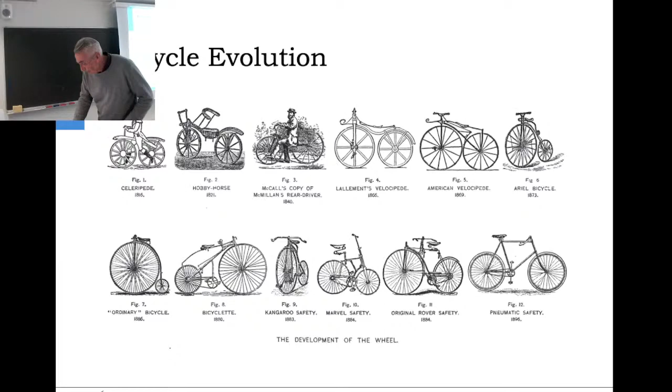Okay, around that time, 1890, also mathematicians, of course, and mechanical guys asked why is it that the bike stays upright? And then Whipple in the UK and Carvallo in France, almost simultaneously, like Newton and Leibniz, it's always that somewhere an idea exists around the globe and people start thinking about it. And people have priority, but well, priority is always difficult.

Anyway, they come with a model and they like it as simple as possible, but still with all the ingredients you want to study. So rigid bodies, fixed rider, hands-free, everything's symmetric, knife-edge wheels, so point contact, no side slip, ideal rolling conditions, flat level road, no friction or propulsion. And on these assumptions you can make a model with 3 velocity degrees of freedom.

Meaning you have a bike and the person is glued to the bike, since we're not interested in control, and then you can move back and forth, that's 1 degree of freedom. The bike can lean, that's the second one, and you can steer, that's the third one.

But due to these wheel contacts, which in a nice way are called non-holonomic constraints, you have a bit of a difference between the configuration space, the coordinates, and the velocity space. Because the configuration space is of course bigger than 3 degrees, because you can put your bike anywhere on the plane at some heading, and that will not show up in the dynamics. In itself also a very interesting topic, but I cannot talk about it.

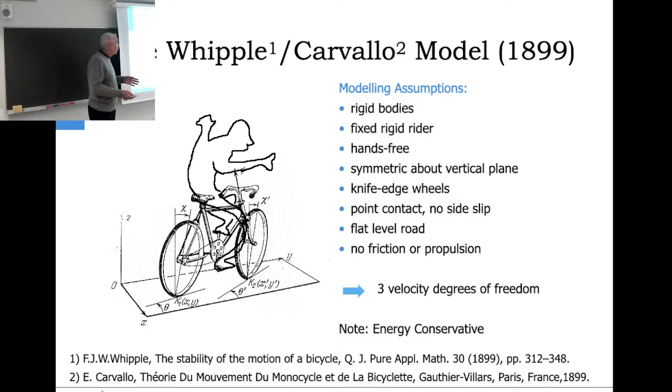Note that the system is energy conservative. No energy is going in or out. And that's already a bit in contradiction with what we see, because we saw in the video that there was an oscillation and the oscillation died out. So we said that's damping. But in this model we have energy conservation. So you could say, I don't know if I'm going to see this whole stable thing, or maybe something else is going on. So what do we do?

Well, this is your daily bread work, right? No problem. What do we do? Well, we just apply Newton. People get bored easily because this is so easy. You know, this is like daily living.

So you just do some Newtonian mechanics on the constrained system, and then you get your differential equations for your 3 degrees of freedom. They are second-order differential equations. And the lean angle phi, the steering delta, and the forward speed are decoupled. We do linearized equations because we want to study stability.

In a linearized sense, the lateral motions, which are the leaning and the steering, are coupled, and the forward speed, the forward motion, in this linear system riding straight ahead, not going in a circle, is just decoupled. So let's start with a simple one. V dot is 0, meaning that the forward speed is constant. Which makes sense, there's no propulsion or braking.

And then the other one is a coupled second order system of leaning and steering, and there's some mass matrix, of course, there is some sort of damping, and that's linear in the forward speed. We find forward speed interesting because at 0 speed it falls over, but given some speed it stays upright, so we try to pull out that one parameter, that speed. You could also pull out the wheelbase or the head angle, but for now we find the speed very interesting. So this term is linear in the speed.

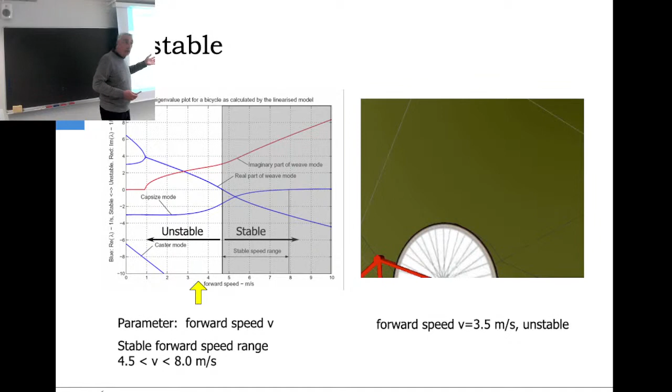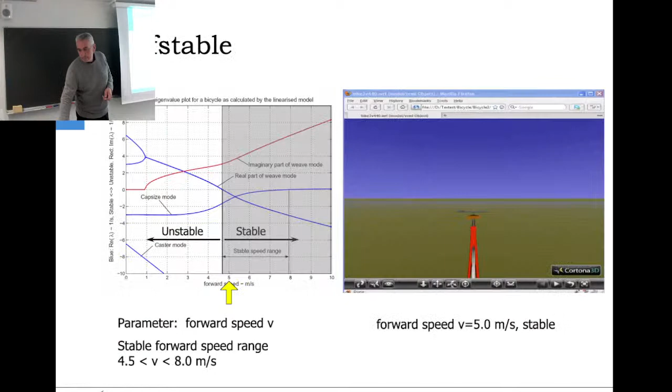If you have a toolkit, there's not one screwdriver and one pliers and you say, okay, this is it. No way. Your toolkit is filled with all kinds of tools, right? So we need all kinds of tools to analyze our dynamical system. And one of them is linearized equations to look at stability. Which we haven't discussed much. We have not discussed much. But in a real design problem, it becomes very handy to use it every now and then.

Excuse me. The speed range that you introduced to us was between, I believe, 0 to 10 meters per second, and you said that the most stable state is between that. What I'm curious about is what happens afterward. You mean if you get more speed? Yeah, if you go faster. Oh yeah, that's a limit case. So let's assume you go very fast. First I go back to the equation. I'm an equation man, right?

So let's assume that V is very large. Very large compared with what? We always have to compare things. In this case, we have two terms. One is a gravity term, and the other is this velocity term. So if V becomes large, the gravity term stays constant, so you can sort of cross out this term, right? So it's like cycling in space. There's no gravity. Let's presume you can cycle in space in some way.

Then it becomes interesting, because the phi dot and delta dot terms have linear v, and the phi terms have v squared. If you now make the characteristic equation, the gravity term is out. And you suddenly see you have lambda squared, lambda times v, and v squared. Then you can do a scaling by dividing everything by v, and suddenly the whole velocity is gone. The eigenvalue divided by the velocity is just the thing you want to calculate.

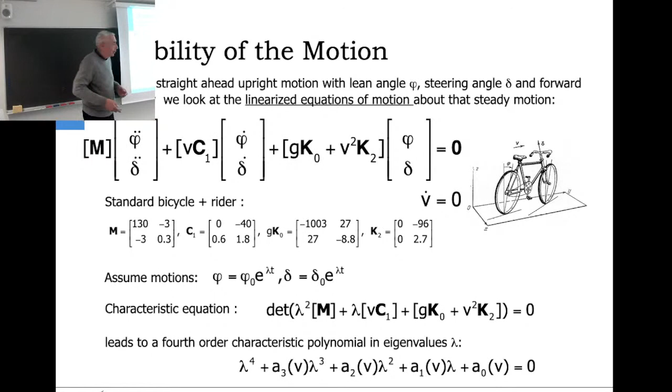Let's go to the figure. What do we get then? We get just four numbers, and it's all linear with speed. So this line is coming to the origin, and it just progresses linearly. This line will go eventually to 0 in an asymptotic way. This line will also progress in this linear sense, and this one too.

So from a stability point of view, the capsize mode will go away, of course, because capsize had to do with gravity and there is no gravity. And the whole dynamics then just scales with the forward speed. So if the speed is twice as large, the oscillation will be twice as large. But it's stable. Yeah. Good question. Nice.

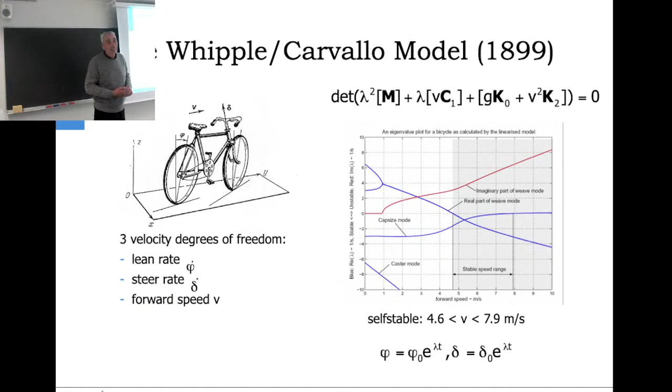Okay, bicycle self-stability. Now we've shown by a very simple model that yes, bicycles can be self-stable. The big question is, why are they self-stable? Which ingredient makes them self-stable? Is it the pressure in the tire, or the nice yellow handlebar which you have, or the wheelbase, or because we have the wheels turning and it's like a gyro, or you have a slanted head angle, or it's the position of the rider on the bike?

You like to understand the system, and for understanding this self-stability, I always call it automagic control, because it goes by itself. How does it work? That's a difficult question. So we want to know actually how does a bike balance itself, and we have no clue because we cannot say, hey bike, how do you balance? And then the bike will be very quiet, right? It will tell you nothing.

Well, we could think, well, how do we balance the bike? Because if we are able to balance the bike, probably the bike, if it's self-stable, also will do something like that. The bike is sort of an optimizer. But still, if I ask people in the audience, how do you balance a bike? What do you say? How do you balance your bike? It's completely intrinsic, I believe. Like you do it somehow subconsciously.

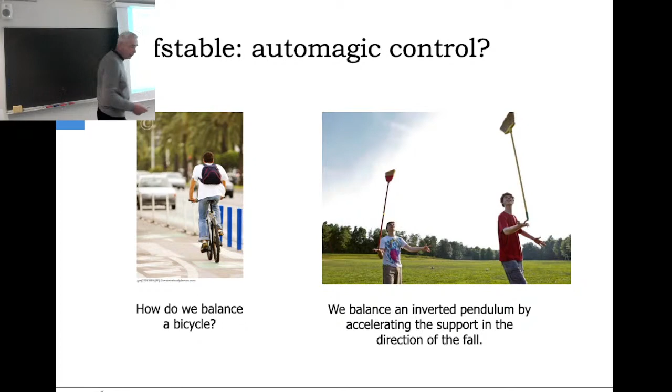So what I do is, if the stick falls to the right, I move my hand to the right. And if the stick falls to the left, I move my hand to the left. So, as you say, with the center of mass, I try to put my hand all the time under the center of mass. And the center of mass is moving, so I have to move my hand, but in the end that sort of works. Okay. Now with that idea in mind, balancing a stick on your open hand, how do we do it on the bike?

So for the bike to balance and move the contact points, we have to move the earth, right? It's not going to work. So apparently there's another system, and yes there is. We have a steering assembly. So if the bike is moving forward and we make a turn, then we move our contact points in a lateral sense. For instance, in this case the bike is moving forward, I steer to the left, and then my front wheel is accelerating to the left. And then my hind wheel will trail in that same direction, of course.

But I have a mechanism here by which I can move my contact points to the left and right. And the mechanism is called my steering assembly. So apparently, only with the steering assembly, you should be able to balance. Well, you need not fall off the bike, but the whole system can apparently be balanced. However, there is an interesting thing already.

So if you fall to the left, then you want your contact points underneath. So then you have to steer to the left to get upright. And that sounds super crazy, because you would think, oh, if I fall to the left, I steer in the other direction. No way, that's totally going wrong. Double trouble, we call that.

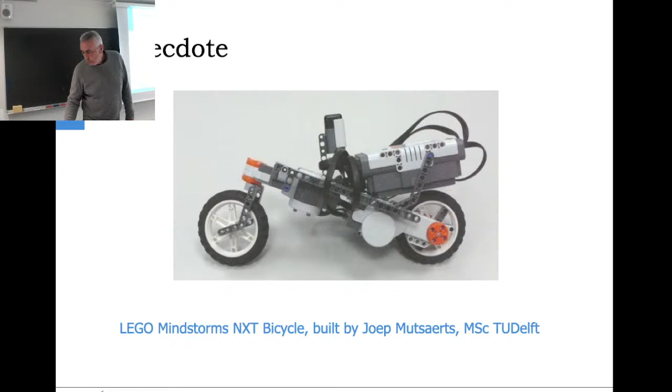And then Joep Mutsaerts built the thing as a master student, and actually he couldn't get it working. So I said, well, you just apply a steer into the fall. And then he said, yeah, how do I do that? Well, I said, there's a very simple law, steer into the fall. You have a steer motor, it's probably a small DC motor. So you apply a voltage; the voltage which you apply to the DC motor is apparently the torque. That's at 0 speed, because there's not much steering going on.

And then you measure the lean rate of the thing, and then you multiply it by 10 or minus 10 or 100 or minus 100 or whatever. You need some gain here, you need to have the sign right, otherwise you steer in the wrong direction. But you have to fiddle a little bit and it will work. And instead of going to work, he looked at me and said, yeah, but that's only one line of code in my controller. I said, yeah, okay, what's the problem? Because before he had the angle and the speed and this, he had a very complex thing.

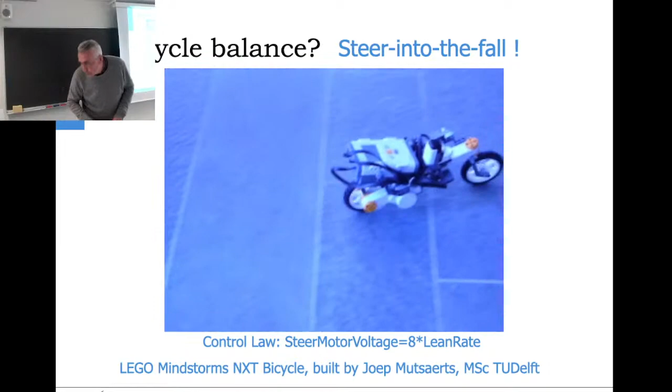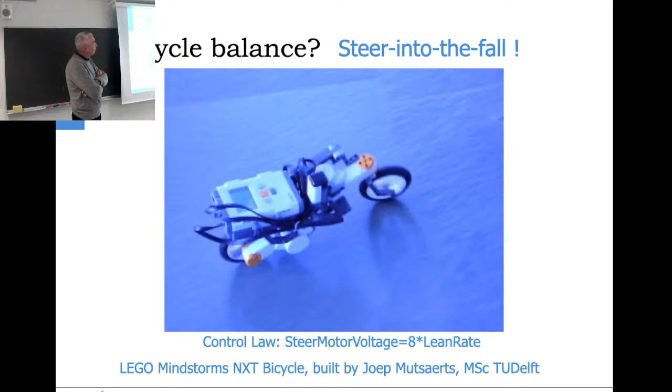So he went away, and after 5 minutes he returned with this thing. Totally autonomous, and the only control law is steer into the fall. It stays upright, so it works. And again, if you look at the video in slow motion, you see the bike falls to the left and then steers to the left. Bike falls to the right and then steers to the right. And of course, because it's the only way you can balance. So we observe it also in a real bike.

Of course, then comes the next question. Why does the bike do that? Does it have some deeper mechanism to do that? And there were actually 2 groups of people who had given that thought. One was, well, it's a gyroscopic effect of the front wheel. So the front wheel is like a big gyro wheel in space. It's rotating, and with gyros, it's always a 3-dimensional thing.

So if you have a rotation about one axis, and you then rotate it about the second axis, the vertical one, you get about the third axis, the horizontal, a torque. That's what you feel then, also. And if you look, the signs are correct. So if the wheel is turning like this, the angular momentum is in that direction. If you then steer it in that direction, then you have a change in angular momentum, and that makes this balancing act also in the right direction. So yes, this steer into the fall can be done by gyroscope.

However, if you check the numbers, then the rotation speed is not so high, the inertia is not so high, and the torque is very little, but on the other hand, the steering assembly is also little, so who knows?

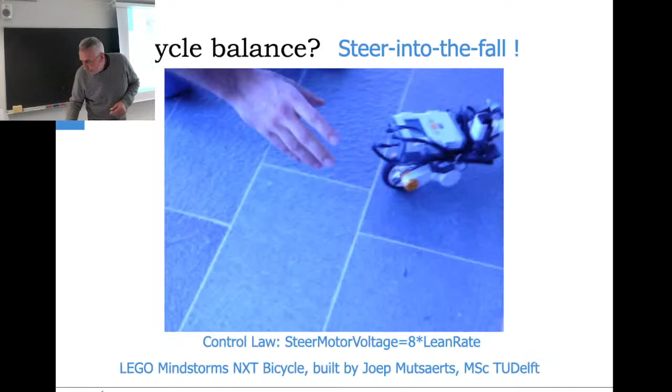Something caught my eye at first, and now I saw it again. Why does this bicycle in the previous video not have a seat? Does it have any effect on the center of mass?

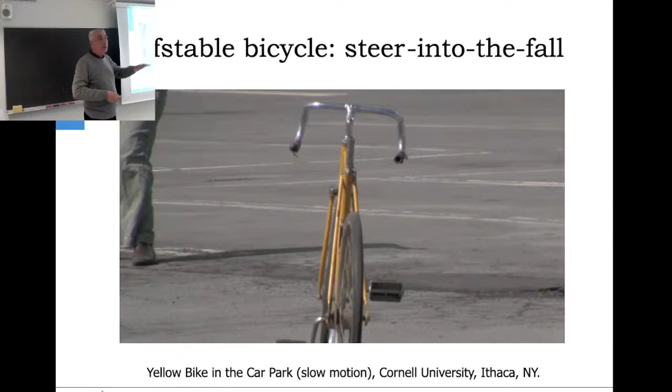Well, you could investigate that, of course, in your model. You could say, well, if the mass is lower and the center of mass is low, it changes the dynamics time scale a little bit, but that's all. Not so much. Good point. And there's nobody on it because of ethical reasons.

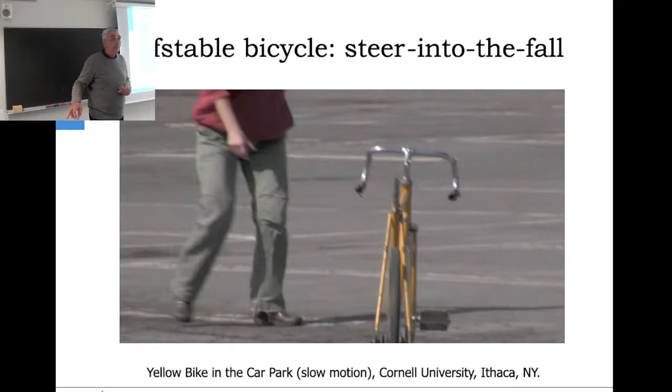Since we are paused, can I ask a question about that number, that constant? How could you arrive at that 8? Oh, yeah, actually you at least need a PhD for that. Too soon to ask. And then the question: after you got the PhD and you took all the classes, how do you derive that?

Well, you just guess a number. So you get the PhD first and then you guess. You just say, okay, let's start with 1. Oh, it's the wrong way around. Let's do -1. Actually, nothing is happening. Maybe it should be bigger. And then 100. No, that's too big. So you came to that by trial and error? Exactly, and a little bit of intuition.

Okay, and another thing: in order to go back to being stable, we have to, not tilt it, but somehow give it a new direction, based on what you said. I don't know how to say what I mean. Steering into the fall? Yeah, steering it. It might sound stupid, but I'm curious about it.

Does it matter, the scale that we steer it? Somehow there should be an optimized value for that. If we go a little bit more than that or a little bit less than that, what would be the result? Are we going to be stable in less time, or does it take more? Good question. I have no idea.

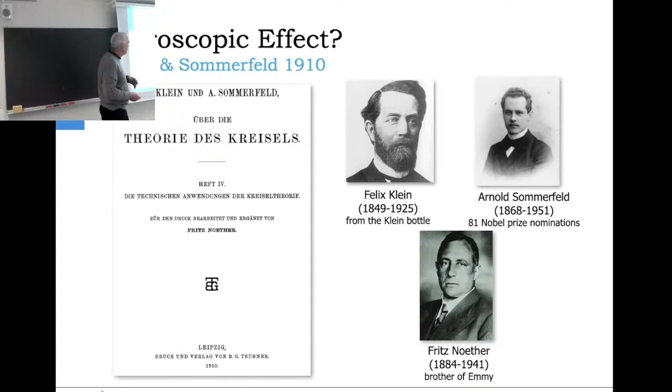So then, in the fourth volume, it was about all these applications. And of course, if you're in gyros, you look around and you see gyros everywhere, right? So when they looked at the bike, they said, "Oh, there's a gyro." So they immediately dug up the literature. They looked at this Whipple paper, went into the derivation, and showed from the stability analysis: well, if you kill the gyroscopic effect, it can never be self-stable, because the equations tell us this sign is plus and that's minus, and we kill it, it's gone.

And let me guess, this was the last book about the applications. The applications, yes. Last book.

However, my friend Jaap Meijaard, who is my colleague on this work, he is the smart guy. He just followed the whole derivation, and he discovered 2 small sign errors. And mind you, the book is from 1910, and after that everybody copied the result, right? Until 2017.

So no one noticed that there was a problem. No one, exactly, noticed that there was a sign mistake. The only thing they were debating was whether these effects were bigger or smaller. But they never checked the work.

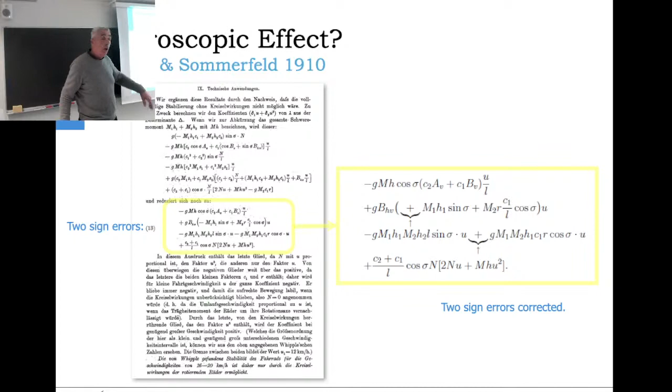They never checked it. So between 1910 and 2017, finally in 2017, Jaap Meijaard discovered the 2 sign errors. He puts in the corrected signs, and then it's not so clear anymore that if you kill the gyroscopic effect, the thing is always unstable. So that's one debunked thing, because everybody was always giving a reference to Klein and Sommerfeld: the bike is self-stable because of the gyroscopic effect. Maybe not.

However, Jones, from Cambridge I think, 1970, PhD. He was, I think, in chemistry, but he was interested in cycling, and he had an intuition that the gyroscope is not so important, it's a small contribution. So to demonstrate that, he built an apparatus where you kill the gyroscopic effect by mounting a counter-rotating wheel next to the front wheel in one frame, so the net angular momentum is 0, and then he says, look, mommy, I can even ride without hands.

There's no problem controlling this bike, because self-stability and ease of control, he said, are identical things. I have no way to measure self-stability, but I can measure very well on the bike how easily I can control it. I can ride it without hands, no problem. So the gyroscopic effect is probably not so important, because with and without, I feel not much difference.

Then he looks at the trail, where the contact point is behind. He changed the trail so the contact point is in front of the steering axis, by putting that wheel forward. And suddenly, it's a horrible bike. He cannot ride it without hands. With hands, it's very hard to control. So he said, well, it must be this trail thing.

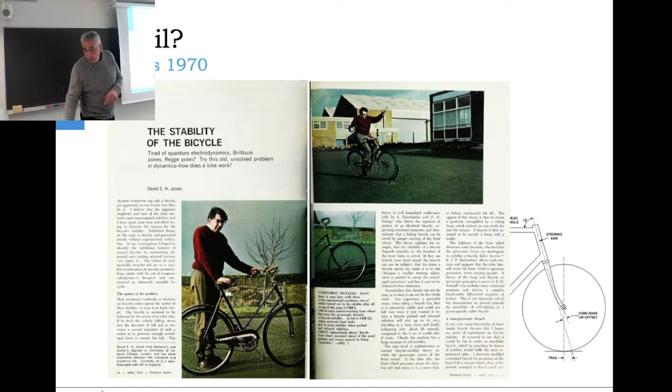He does some analysis on potential energy in gravitational systems, comes with graphs and slopes and reasoning, and says, look, if you kill it, then it's all negative and unstable and it shouldn't work. There's a small thing here. He only uses gravitational energy. That means speed plays no role. Gravitational energy is the same for a moving bike as for a steady bike. The whole dynamics doesn't come into play.

So if we correct his reasoning with our dynamical system, another term comes up, and then it's not so clear anymore that stability is lost if you make the trail 0 or negative. Again, a lot of people followed Jones after the 1970s: Klein and Sommerfeld's effect is small, it's the geometry of the steering assembly that's important. Both things are apparently not necessary. And we are looking for necessary conditions for self-stability. Sufficient and necessary.

So what do we do? Well, we have our model. That's simple, right? We have our linearized equations. This is the bike with our 3 degrees of freedom, a manageable system, not too many degrees of freedom. However, the family of bikes is big.

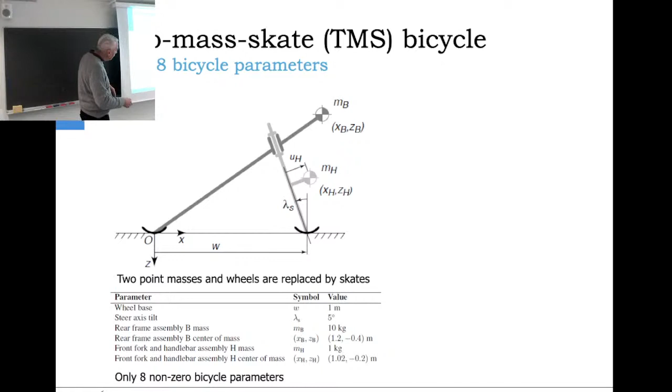And now with the 8 parameters, I can write those equations on one piece of paper, and I can go through my equations. And I can finally come to the conclusion that the position of the masses, the mass from the rear assembly and from the front assembly, have some condition where they have to be. If it's here in this area, there is no condition on the mass. If the front mass is in this area, then it's always self-stable. And if the front mass is in this area and fits this condition, which has to do a little bit with the geometry, then it's still self-stable. So mass must be up front here and have some condition in relation to the geometry.

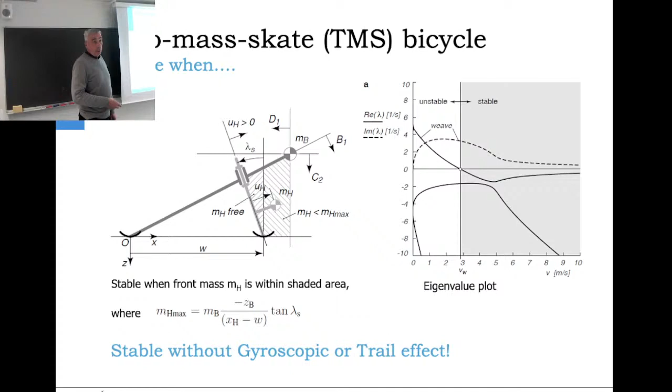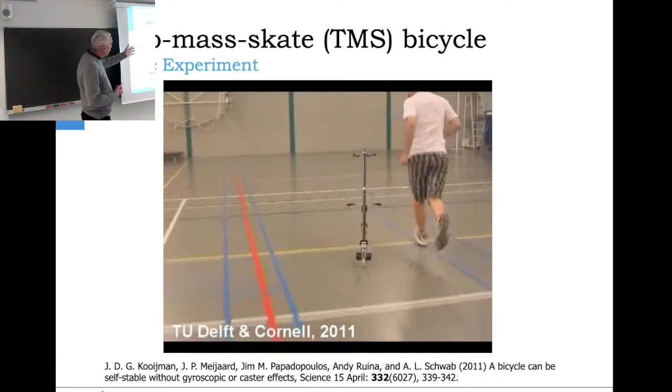And then if we look again at the forward speed and the eigenvalues, we see this clear cutoff, and after that speed, it's always self-stable. Stable without gyro or without trail. So that is interesting. So then we build it. We build the machine, we go to the sports hall, and then we just give it a forward speed, and it stays upright.

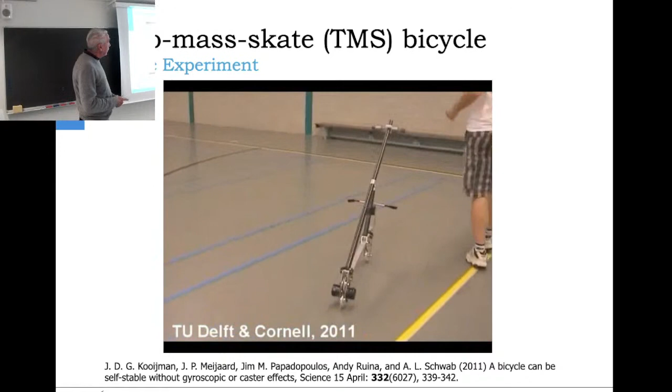I didn't plug in the mouse? That's not too bad. It's okay. That's your computer. What battery is that? Okay. All right. So again, let me go back because it cut my story.

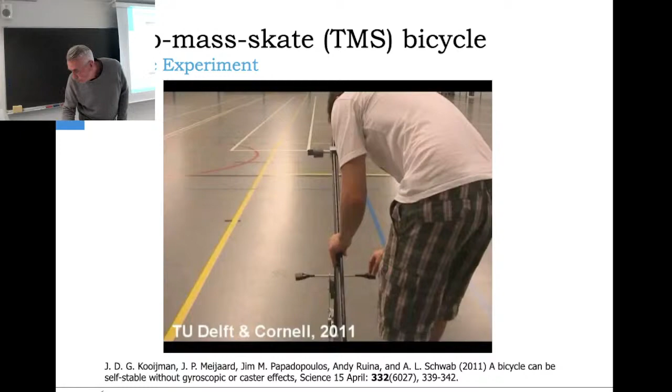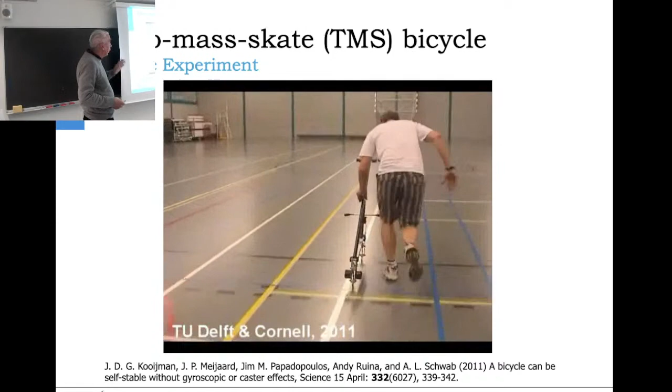So again, we give it just a forward speed and put it in this straight upright motion and see, will it remain there? There's always a small perturbation, of course. It remains there. And then we do the second test: we propel it, and then we hit it sideways, and hopefully it will not fall, and it will come back again, and you see, there's oscillation and the oscillation dies out. So self-stable, without gyro and without trail.

And that was actually the topic of our publication in 2011, and we were able to publish that in Science. And we needed that. Because before that time, when I talked about bicycle dynamics, people said, nice hobby. What is your work? I said, bicycles. No, your work, not your hobby. I said, no, that's our work. Oh man, that's more than 100 years old. There's nothing new there. Are you not in AI? No, bicycles. This paper finally showed that there's things still in this whole bicycle dynamics which are unclear, or where people thought it was because of some printing error.

Yeah, but that's nice, because you know Science. You make a list of most appreciated journals. Is Science the first or second? That doesn't really matter, but it's really highly appreciated, together with Nature. And then there's a whole big hole where there's nothing.

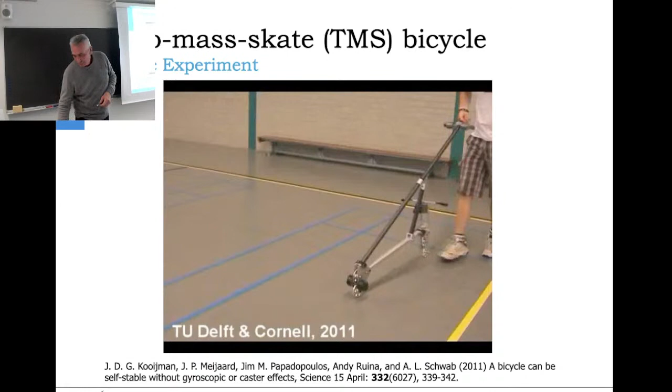So I think it's with an index of 57 or 60, something like that. And then highly appreciated. Multibody System Dynamics is... so one, that's done. Could be a bit lower. Let's say that is lower than science. Yeah, I can say that with a high confidence. Me too. But we're doing our best, eh? Yeah, of course.

Okay. Now we looked at the bike, right? The next step is, of course, what are we doing on a bike? Because we've seen that for regular bikes at slow speed it's unstable, and if you look outside, people do not fall. Well, some people fall, but they even can ride at low speed. So what is going on?

Sorry, that's my... I'll close it. Okay. Close. Go away. Connection lost. Close. Yeah, it's gone. Thank you.

So, riding control and handling. The big question is, what do we do on the bike? How do we keep the bike upright? Two pictures. One of them is super famous. That's my daughter. She is super famous. I think she even popped up in talks in Japan where somebody used our slides and talked about bikes. So she's famous. And the other, I know this other guy, I think.

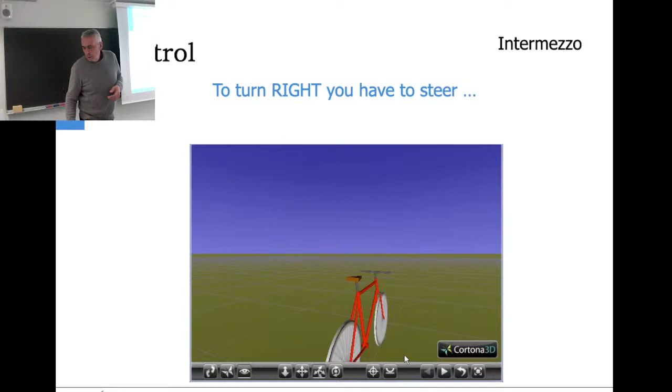Well, anyway, if you look at them and observe what is going on, you steer and you balance, but it's sort of unclear what you are doing. Is my upper body active? Am I doing a thing? Or am I steering and is the upper body passive because the bike is moving underneath? It's hard to distinguish what's going on. With respect to time, I skip this. So, how do we steer and balance?

Now, that question was already old, and in the Netherlands there were already people looking at bicycle balance, not because they wanted to know how people balance a bike, but whether it is safe to ride a bike when you are intoxicated with vodka or marijuana. And that's a typical Dutch question, right? And in the 70s, of course.

The ethical committee said, well, we probably cannot put intoxicated people on a bike and let them ride. So they said, we're still going to intoxicate them, but we built a simple contraption, a bicycle simulator, which leans and steers, and then we study their motions. And of course, looking at the transfer functions, they saw that when you're intoxicated the gain rises enormously, so the steering becomes a lot wilder, and the delay in your control also increases enormously.

And after that, it was not yet enforced by law, but it was an advice that it's better not to ride a bike intoxicated. But I think now it's by law that you're not allowed to ride a bike intoxicated.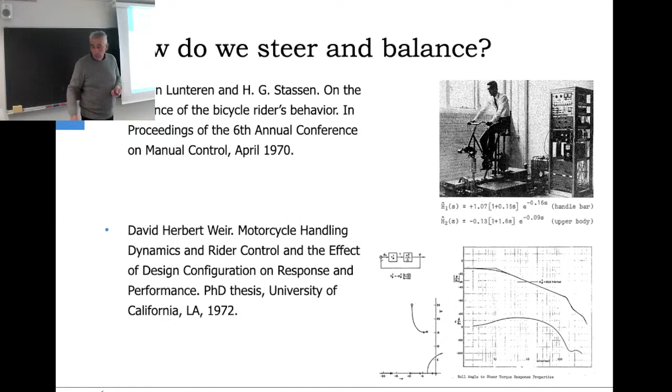It started with David Weir, who made models, and later those control models were validated by experiments. By the way, the conclusion of David Weir was that a regular motorcycle is safe to ride. We concluded it's not good to ride intoxicated. After that, nothing much happened. Still, we were interested in this rider control, so what did we do?

We put all these specific, these are the active markers on the body and the bike. 31 markers, 100 Hertz frequency, sample time 1 minute. One run is a lot of numbers, so we need some data reduction method to look at what is going on. By the way, we were riding on a treadmill, of course, indoor.

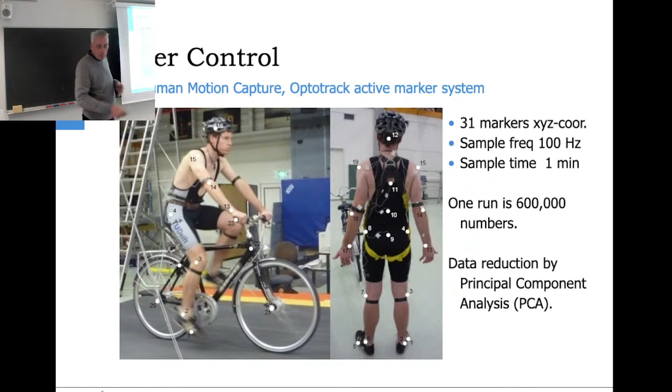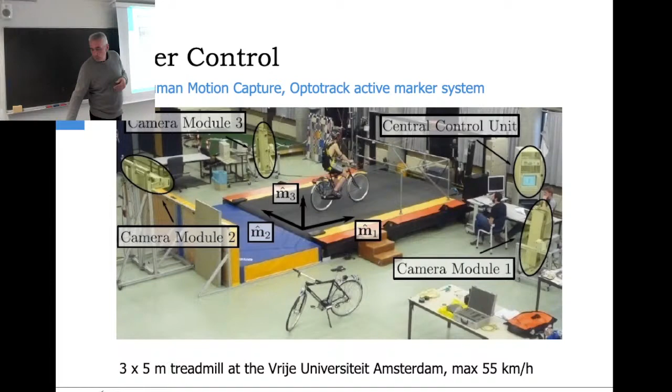And then this was the whole setup: big treadmill, this active marker system with the cameras, and then riding at various speeds and see what is going on. So here you see the video, and here you see the reconstruction of the motion. So a nice way that you can visualize it also. But here you move the ground.

Yeah, yeah. Does it matter? Is there a dynamical change if you don't? No, it is, and it's hard. I also had a very hard time understanding why it works riding on a treadmill, because you're not moving, and you have the idea that when you move, you gain stability due to your motion. But you told us. Exactly. Yeah. And that works. I mean, if you steer and the treadmill is going underneath you, it moves the contact point sideways. So that system is there, and everything is rotating.

But you can do a thought experiment. If you have a big oil tanker, you have a big deck, and the oil tanker is in the harbor, and you just cycle from the bow to the stern. You cycle on the ship, and oh, that works. I can cycle. And let's suppose you go 20 kilometers per hour. Then you ask the captain of the ship, please put 20 kilometers per hour speed. And then he does that, and then thumbs up, there we go.

And then when the ship is going in this direction, you cycle in that direction, 20 kilometers per hour. Right? So you're stationary to the inertial world, but you're cycling, and that works. I mean, you can cycle on an oil tanker. It's moving.

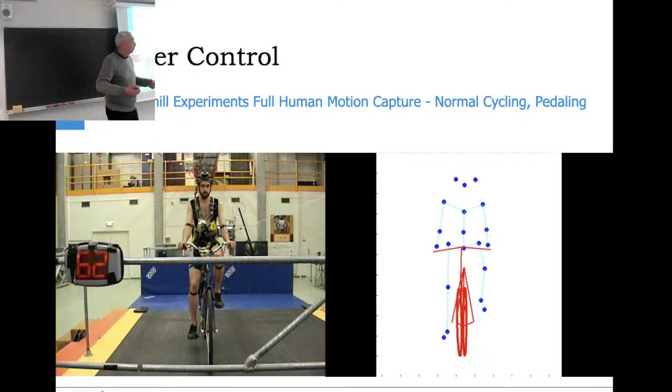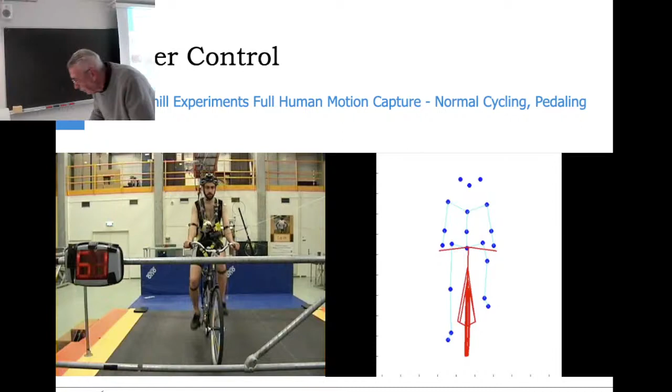Okay. Warning disappeared. Yeah, I can check. So it's no longer there. It's charging. Okay, that's good. So let me take a look. No, the connection is back on, so it's okay. So the only thing that disappeared was this camera from the OBS. Maybe, I don't know. I only know mechanics. Okay, so this is no longer connected. Can I take a look at your OBS? Of course. It's okay. So is it back? So camera is back. Yeah. Okay, thank you. But the slides are not in presentation. Yeah, there will be a delay. It will be soon. Okay.

Before you start, a question. It might sound irrelevant, but the purpose of all those strings, are they just for transmitting data? Yeah, so it's active markers. To capture motion, you have two systems actually. You have the passive markers, just reflective things, and a whole array of cameras that look at these passive markers and try to identify where they were in space. Sometimes markers get lost, and the accuracy is a bit low because the markers have a definite size. There's also an active system where you put small markers, but they are cabled, so we need to tether the person in. But we need to do that anyway because for safety we need a harness here.

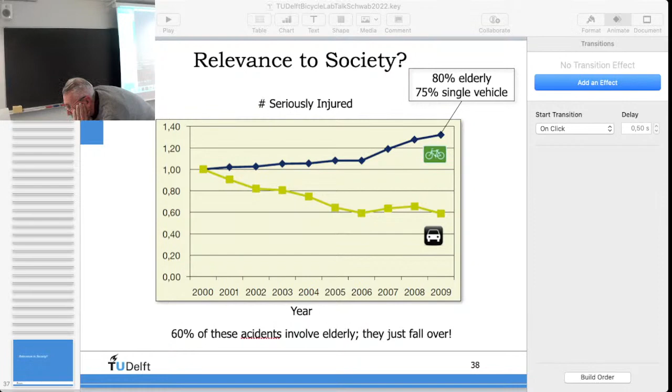So, more people get injured. Among those are a lot of elderly, and it's single vehicle accidents. They just fall over. In this falling over, the stability of the bike plays a role, and the rider control plays a role. So we'd like to understand what is going on. Are the bikes unsafe? Are the people not fit to control them? What is going on? What can we do?

Now, there has been an enormous rise in e-bikes, also here in Finland. And of course, everybody was saying, oh, it's these elderly on e-bikes. They're dangerous. They go too fast. Well, that's a nice scientific question. Is it unsafe for elderly? So we did a study with normal bikes and e-bikes with elderly in real traffic, measuring and seeing if they have extra attention.

It turned out that actually it was okay. Actually, those elderly were unsafe when they didn't have an e-bike, because then they were going too slow and they were not keeping up with traffic, and then things happened. But when they use an e-bike, they go as fast as the rest of the cyclists, and that's actually good. So the e-bikes were not the problem.

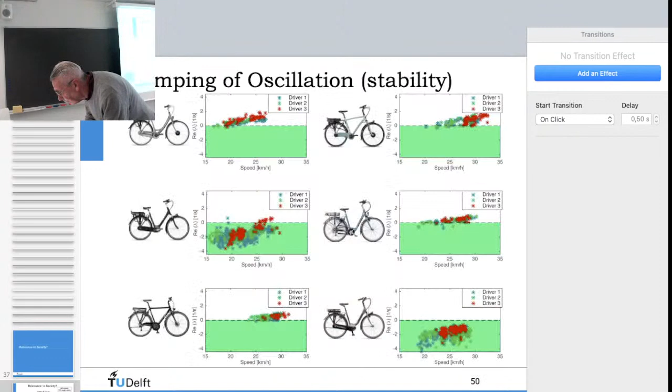So stop. Yeah. So it seems that this live streaming is not willing to change the slides. Don't know why. It changes when you do that, okay, but not automatically. Really?

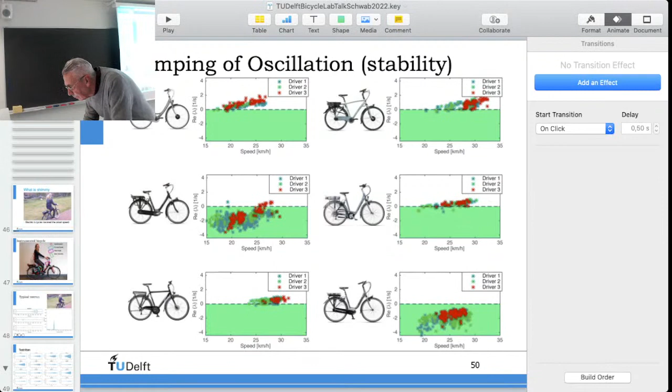What do I do then? Nothing. I think it's okay. It will be okay momentarily. No, it's okay. Yep, it's okay. Don't know why. That's okay. It is what it is. Continue? Yeah, okay.

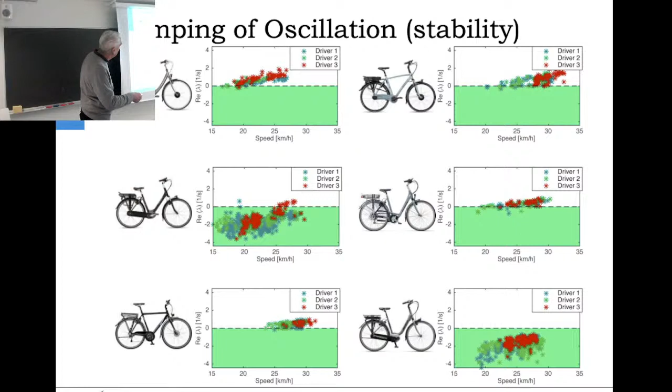Sorry. So this is a very stable one, and this is a very unstable bike, right? And then we try to find out what design parameters do that. So we make that same bicycle model, but now we have to extend it with some flexibility in the frame and tires, and that the upper body can move relative to the bike. So we have to add just some more degrees of freedom to predict this whole shimmy behavior.

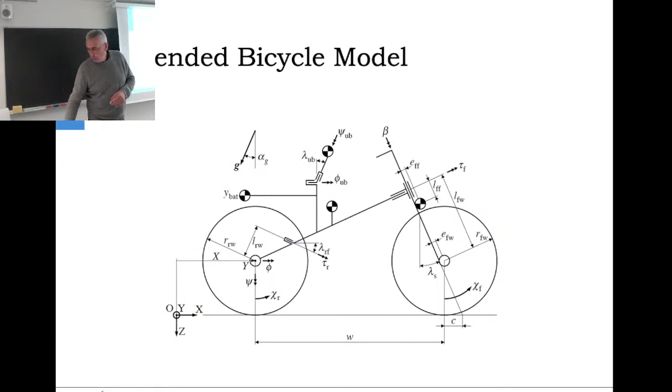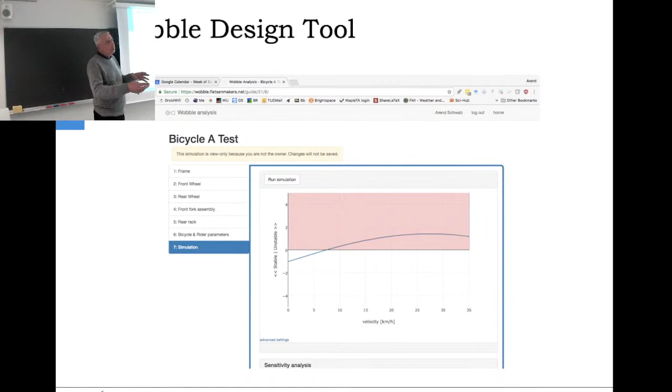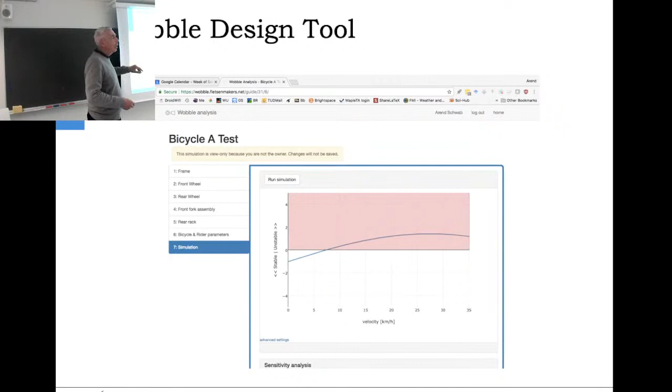And then this model is validated against the experiments, and for the model we built, of course, for the company, a user interface so that they can easily change frames and bikes and then calculate and see if it's stable or not, and then change the parameters. Oh, we do a little bit more of this and that, and oh, this bike has this type of tires, and so that's a very practical tool which they now use for designing bicycles, not in an evolutionary way, but in a scientific way, where they immediately from the drawing board can say, oh, it will not shimmy. And until now, that worked.

Currently, we have done a number of experiments also on societal things, and currently we are working on the basin of attraction of cyclists fall. So this is the cyclist fall experiments this year. We were able to do it in January and February during the COVID period, but it did work. So what are we testing? Well, we want to know about the lateral balance control of the rider bicycle system. What perturbations on steering can you still have, from which you can recover?

So you're cycling and somebody hits your front assembly, somebody hits your handlebars. That happens, right? And then you can recover. Or if they hit it too hard, you cannot recover. But you can say, well, this hit on the handlebar can also be a pothole in the ground, or this disturbance, this perturbation on the system, it's a rather general perturbation. You can also get hits on the frame sideways, but the steering assembly is very sensitive. So we wanted to know from what steering perturbations you can recover.

Now, we worked a lot on rider control models, so we have some idea about rider control. We know what you use, your eyes and your hands, your haptics. We know a little bit about muscles and how they work. There's sensor signals and there's a delay and saturation. So we could build some system with sensors, some controller, some rider control, which is linear feedback with gain scheduling, some biomechanics for muscles, and then we can close the loop and say, oh, this is the balance control, and then we put in a perturbation on steering, and theoretically we can calculate, does it stay upright, right?

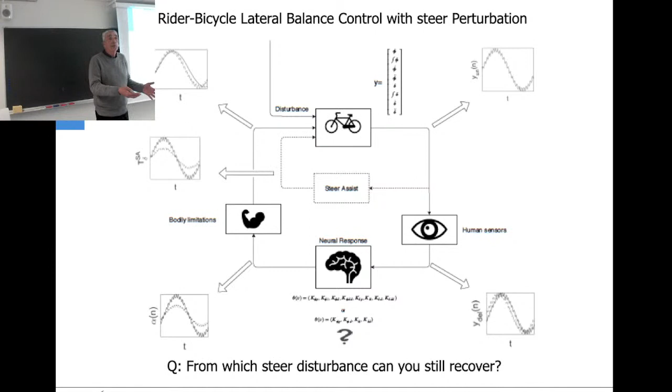So we can just make a big diagram, again where we have forward speed on the horizontal axis, and on the vertical we have the disturbance on the handlebars, and I think it's now in radians per second, so it's an initial speed. It's like you give it an impulse, a hard hit. And then we see again, we have the different types of cyclist. Let's say the naive old cyclist is able to recover from these disturbances. So everything out of this area he cannot recover from. At low speed, he's unable. At high speed, he's unable. And then you have different kinds of cyclists, and smart older cyclists can recover, so they use a good control system. But young cyclists can recover even better.

Well, this is a theoretical result which builds on a lot of assumptions, and we have no clue how true this is. So we want to do an experimental validation. And in my mind, I wanted to do it on the open road. I said we need a skyhook and we need to measure stuff, so that's it.

And I live in the city of Rotterdam, which is a harbor city, and they have big cranes and mobile cranes. And I thought, well, we just order a mobile crane guy, and then we have a skyhook, and you put on a harness, and we measure the thing, and you let them cycle, and then the guy with the crane just follows the cyclist as good as he can, and then we just hit the cyclist, and then he will fall over, but the crane will catch him.

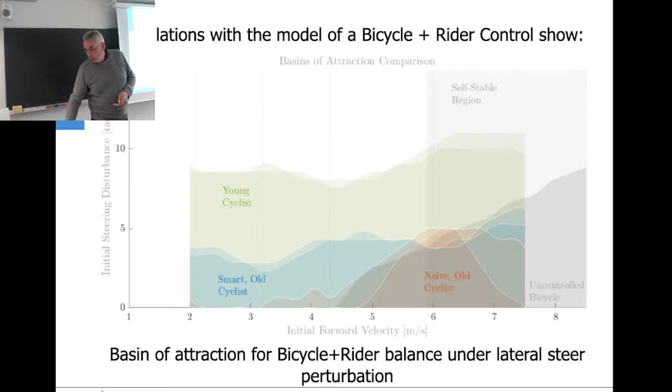Then I also had a plan B, of course. So the plan B was we go indoors, we do it again on a treadmill, and then we need some harness system. And luckily, we had a harness. There is a harness system at Delft for walking, and it's called RYSEN, and it's a linear system, so you can walk on a linear track from here to there, and sideways, something like this, and the harness moves with you. At the moment you fall, it freezes. So it's a number of cables which go through the harness. It's a very smart system, and it's used for walking.

But we said, well, we put the treadmill in there, and then we can do the same. So we put the treadmill in there. We have the harness with the moving cables which freeze when you fall. Now we have to apply a perturbation on the steering. So we have cables on the side of the handlebars, 4 cables, because we want to do a left and a right, and we want to do a pure torque, so 2 forces either this or 2 forces either that. We have cables we can only pull, so we need 4 cables, 4 fast motors, and the motors, their task is to keep the cable taut at a low pretension, and then bang!

I don't know, there's something I need to ask. So the next class will get started 10:15, so soon we need to close, because we're supposed to close at roughly 10 o'clock. Okay. So we can take a look at this example, I think. Yeah, I'll do it.

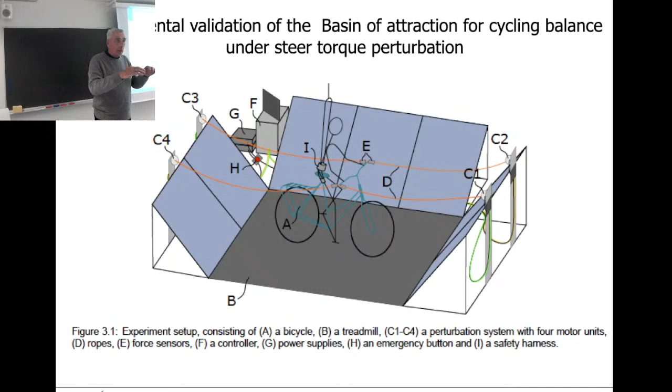And then there are safety mats so that if you fall, you still do not hit the ground, and there's a Speedgoat at high frequency, and then we have to measure the motions, the motion capture system, 13 cameras with passive markers. We have to measure the rate, so we have IMUs. We measure the EMG of the muscles, because we want to know when they are doing something. We have to order the perturbation. We have to measure the force at the handlebars because we want to know what we are applying. All these different systems have to be synchronized and work at approximately the same sample rate.

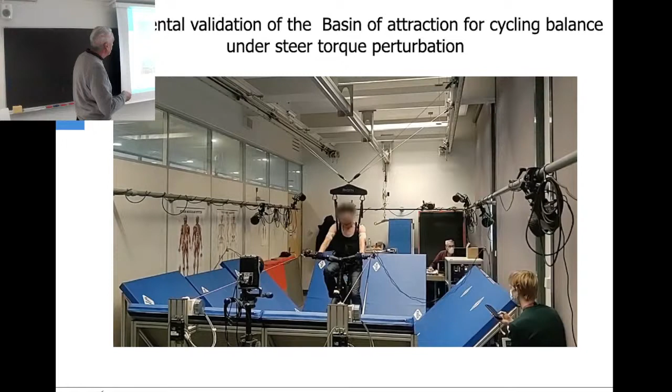Anyway, this is one of the results. As you can see, he's cycling on the treadmill. He's in this harness with these cables. There was a small perturbation going on, and you see the twitch, but he's able to recover. So that first twitch is that he just gets pulled, and then he can come back. So he's stable. See all the cameras hanging here. You see some of the passive markers, EMG stuff, cables. So we're gonna see some good crashes.

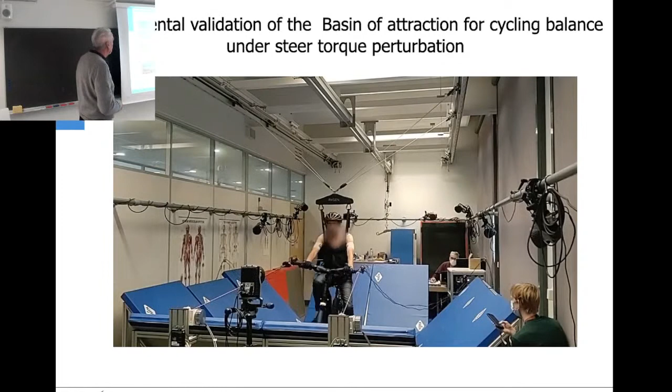Yeah, I was curious about what's the extent of those twitches? Like, that's it. Play again, please. Yeah. Do we have something like that in Loop? No. So you would like to do that? If you want to do that, come to Delft. Okay, I will come. Because here we just have a tractor. I have a question. I'll come to your question.

Can I finish? You see him hanging in this harness. So he didn't touch the cushions, of course. And what we also did, we connected him to the bike. Because in the beginning, in the test trial, the bike was disappearing and hitting the guy hanging. So we have a seat belt on our bike for safety, and we have straps to keep you on the pedals. Question? Sometimes he really wants to rotate. This system can recognize he's falling or he wants to rotate.

The system recognizes that he is falling, and then it freezes the 4 cables, and he stays in that position. But he really wants to rotate? So it's turning. No problem, because it doesn't matter. There's a clear difference between a fall and a human intent motion, unless he is able to move so quickly. But that's not gonna happen.

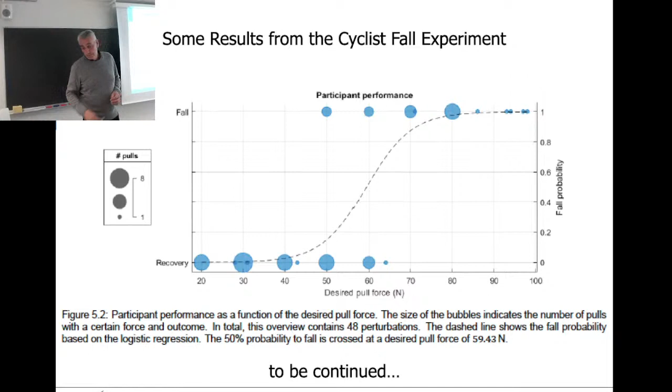No, we never have time to discuss other vehicles than bicycles. But we'll see. Maybe we have an opportunity to discuss those other vehicles too. Trains are very interesting, but they are really special cases. Trains, you know, rail and the wheel. This connection is very unique. And I was in the lucky circumstance that in Delft was Joost Kalker, who was the guru together with K.L. Johnson in the UK on the wheel-rail contact.

He was my personal friend. And his wife is still alive. She's still a personal friend. I did not really understand all his mathematical work, but he always said, well, that doesn't matter. He's a very nice guy.